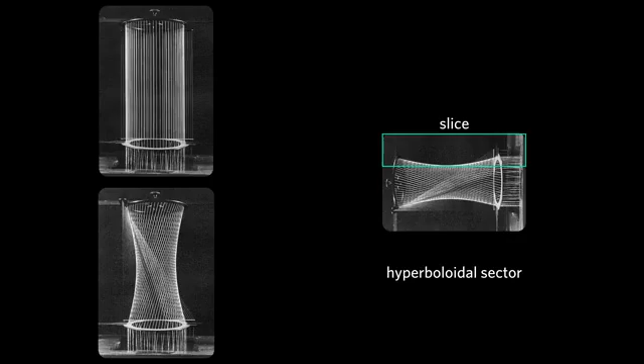If you take that image of these rings, turn it on its side, and take a slice of that, you get the hyperboloidal sector that forms the shape for the overhang or the horizontal cantilever of the Zarzuela Hippodrome racetracks in Madrid, designed by Eduardo Torroja in 1935.

If you look at the span, the size of this horizontal cantilever compared to its thickness, you see how thin that reinforced concrete is compared to the size of the structure. The reason it can hold its own weight up is because of the form. It's not because of how thin or thick a structure is.

The fact that these structures are so thin and can carry their own weight indicates that it's about the form of the structure. It's not about how thin your structure is or how thick your structure is. If you have the proper form, you really do not need a lot of material to hold its weight and the loads imposed upon the structure.

I can demonstrate this concept for you with a simple piece of paper. The single piece of paper can't hold its own weight if I hold it like this. However, if I just give it a little bit of curvature, it can now hold its own weight. It can even hold a few pieces of chocolate, like this. And you could get creative at home and try different examples.

For example, you could take the paper and fold it into a fan shape and even attach a cup at the end. It can hold not only its own weight, but the cup. And then maybe hold a little competition: who can design a horizontal cantilever to hold the most chocolates in that cup. And you'll be surprised to see the incredible amount of load this single piece of paper can hold if you give it the proper shape.

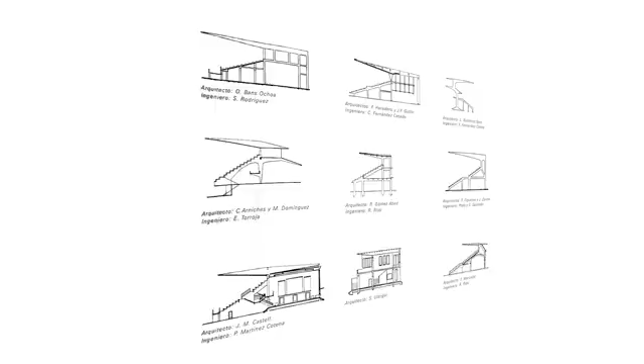The Zarzuela Hippodrome was part of a design competition. You can see on the screen the many entries that were part of that competition, which represents the many different solutions that an engineer and architect team can come up with for the same problem, that is creating a horizontal cantilever to cover the stands.

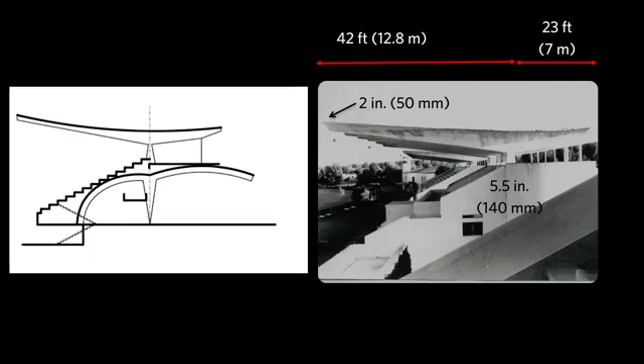The final design put forward by Torroja and his team is shown on the left and in the image on the right. However, this design was not the initial or the original design proposed by the team. It was an evolution of thought. In the end, the cantilever spanned 42 feet in one direction and 23 feet on the other side. In the middle there, we see a single support. Let's look at this final form.

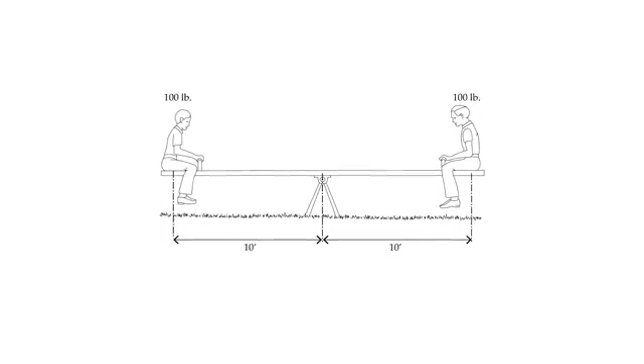You can think of this as a seesaw. Most of you as children played on a seesaw in a playground. And you know that if you and your friend weigh the same, maybe you played that game where you tried to balance that plank on the seesaw so that it would stay still and horizontal. That would only work if you weighed the same and the planks were the same length to the left and right of the support.

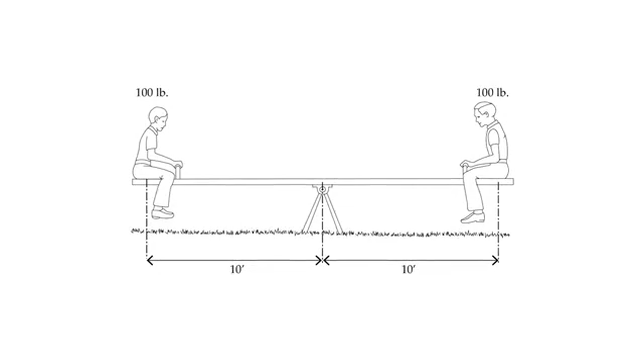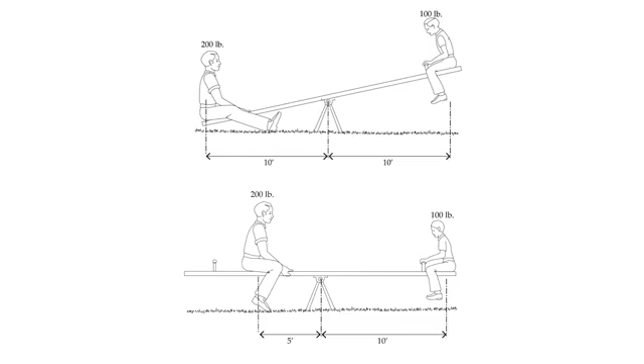However, if your friend weighed twice as much as you, he would need to sit about halfway up from that center support for you to find that balanced position. If your friend that weighed twice as much as you sat at the tip of the seesaw, so you had the same length from the support to the ends, you would fly up and your friend would be sitting on the ground. And the only way to get this plank to stay horizontal would be to tie a rope from your end down to the ground.

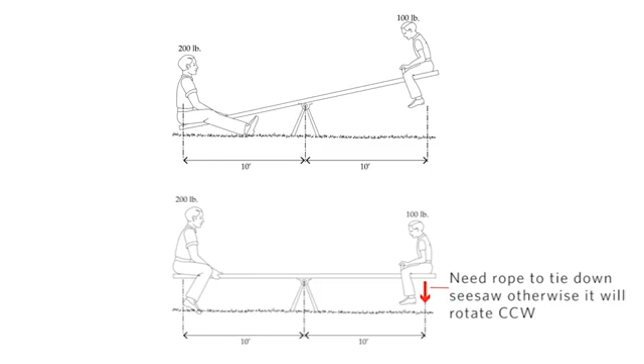In other words, this rope would be able to hold this plank on the seesaw horizontal. That is the concept behind this horizontal cantilever of the structure. Because the left side, the 42-foot span, is longer, it weighs more than the 23-foot span on the right side. So there is a tie that needs to be there in place to hold that horizontal cantilever stable.

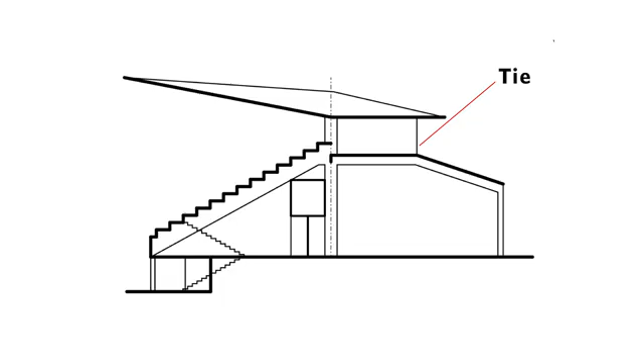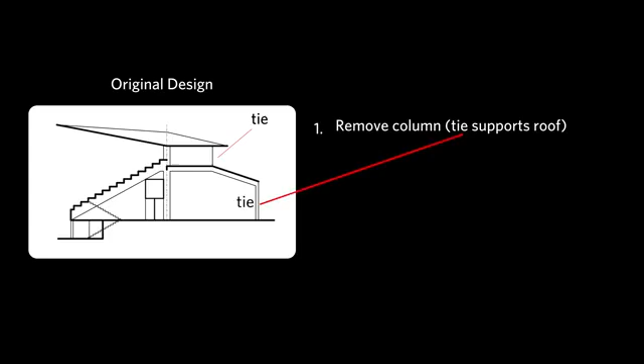Torroja realized that that tie was also going to support the roof underneath it, and therefore the column that was there initially to support that roof wasn't needed. Next, he noticed the staff gangway that was right beside that massive column in the center holding this horizontal cantilever and other parts of the structure. That column was large enough to be able to cantilever this staff gangway. In other words, that staff gangway did not need its own column, and that column could also be removed.

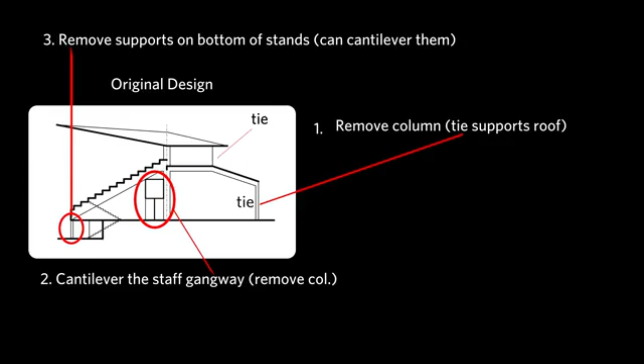Next, he removed the supports on the bottom of the stands, again noticing that that part of the structure can be cantilevered and that column there was not needed. So you can see with the first revision compared to the original design, already he's cleaning up the structure, meaning he's removing unnecessary elements. In the next iteration, he sculpts the main column.

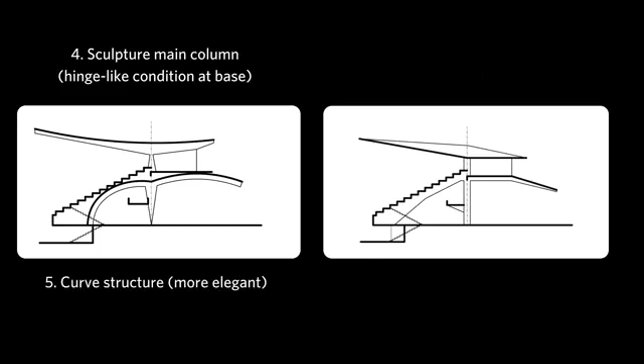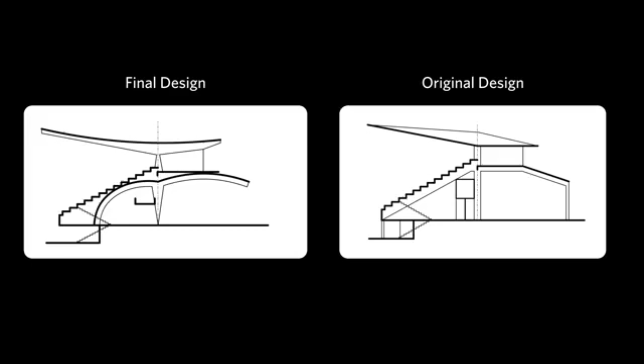He creates this hinge-like condition at the base and also at the top where it narrows. The column narrows at the top and at the bottom to reduce the amount of bending moments in that column space. He also curves the structure underneath the supports to create a more elegant appearance. And with these iterations, we have the final design, the winning design of the competition, and if you compare it side by side to the original design, you see a significant improvement.

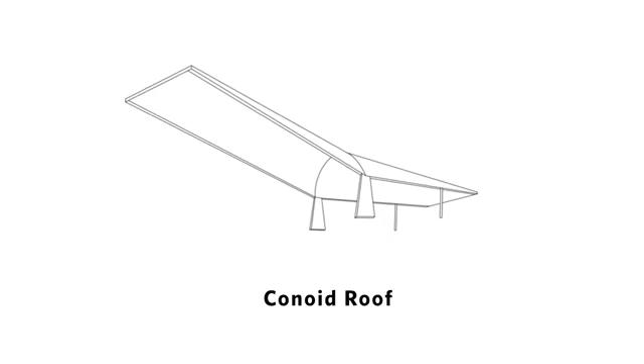Another revision was the shape of the roof of this horizontal cantilever. Originally, it was a conoid roof, a conoid shape, which is the same shape as the schoolhouse roof done by Gaudí. And in this shape, you have a straight edge at the end, at the 42-foot overhang end. Torroja changed the shape to a hyperboloid roof. And what this means is that at the end, you have a scalloped effect instead of a straight edge.

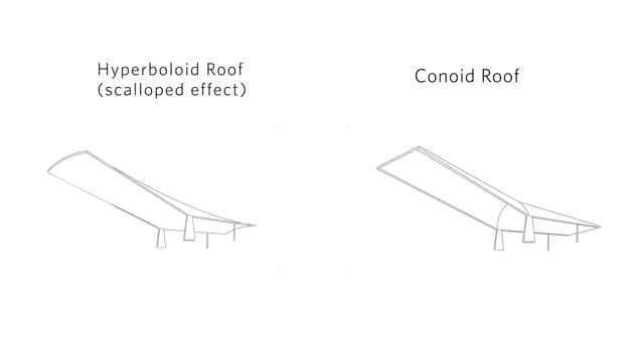The double curvature of this roof makes it very strong. It withstood substantial bombardment during the Spanish Civil War when 26 holes were blown into it. These holes were covered over with concrete and the roof remained intact.

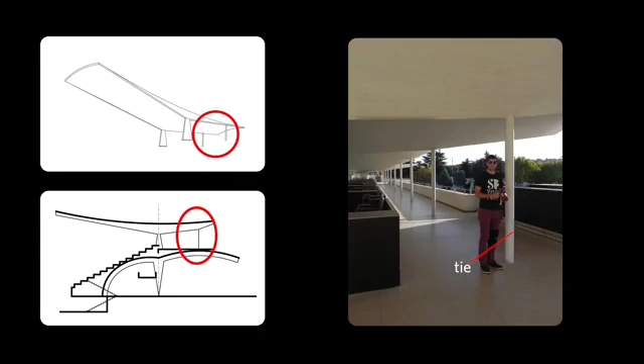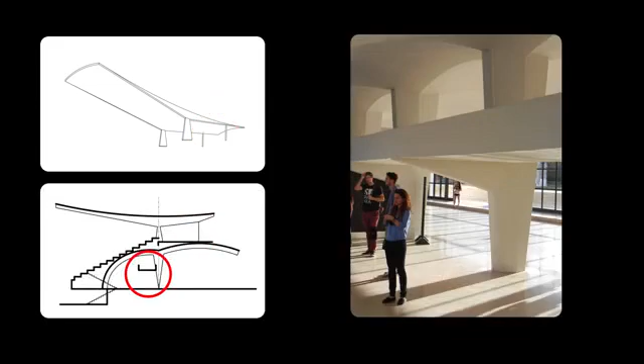I traveled with some students to visit the Hippodrome, and to give you a sense of scale, here you see a student standing next to that tie. From down below, we see the staff gangway and that column supporting the horizontal cantilever. And sitting at the top seat of the stands, again, we see that column which narrows as it approaches that horizontal cantilever. The design for the Hippodrome was intended for a design competition that had a 3-month time limit.

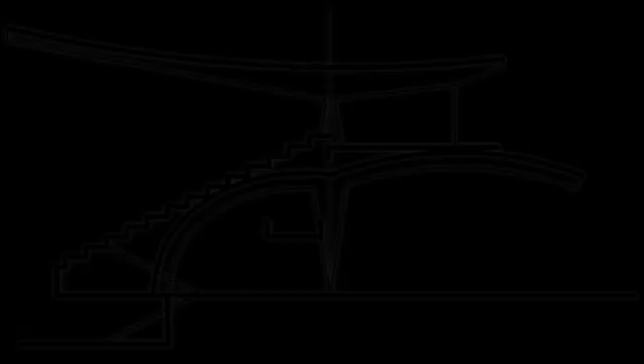Torroja wrote that the whole process just described was a matter of a few minutes, possibly seconds. He reflects on this experience and, generally speaking, the process of design. And when he does this, he asks himself, was this process an imaginative process, or was it logical reasoning based on technical training? In other words, he was asking himself, was this play or was this discipline?

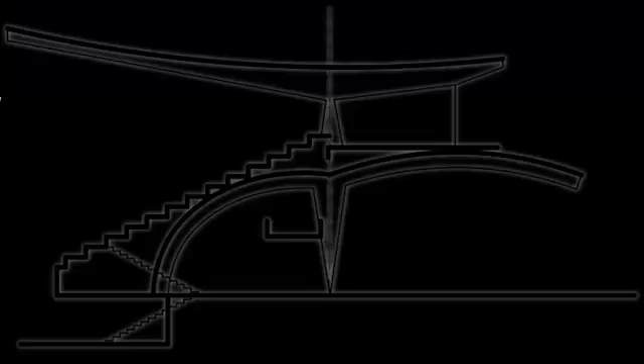This idea of discipline and play of the engineer, that the engineer is bounded by the laws of physics and equilibrium. So there is a discipline there that the engineer must be knowledgeable in. But inside of this discipline, there is room to play. And he answers this question by saying that it's both together, that it's both discipline and play that brought about this evolution of design to the final form.

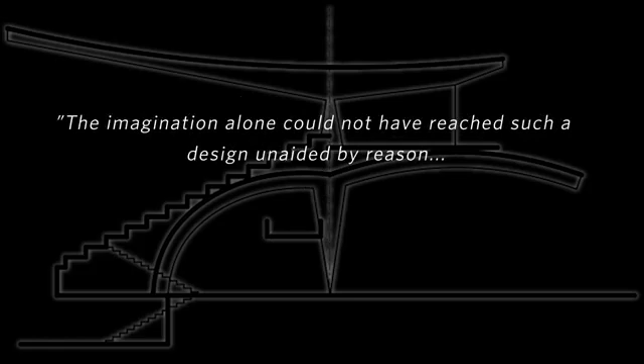He says, quote, "The imagination alone could not have reached such a design unaided by reason. To me, it seems clear that the imagination can operate successfully only in conjunction with the basic principles of technical creative work." This is one of my favorite quotes explaining this concept of discipline and play.

One of my closest colleagues, Ignacio Payá Zaforteza, who is a professor at the Universidad Politécnica de Valencia in Spain, has written many research papers on Torroja and his works. I had an opportunity to ask him some questions. Why don't you start by telling us what inspired you to study Torroja?

It is a curious story because when I was a student, everyone was telling me that Torroja was a genius, but nobody was explaining to me why he was such a big genius. So then I decided to start doing some work and trying to find the original documentation about his work, doing some analysis to discover why he was such a great engineer, so important. And what did you discover? What made Torroja so special?

To me, a nice thing was to discover that he had many things to do with E.T. E.T. the extraterrestrial? Yeah, Spielberg's character. Why? Not only that none of them had too much hair, not only that they had the same initials, E.T. and E.T., but when you study in depth the works by Torroja, you see that his ideas were much more advanced than those of the people of his time. So somehow it was as if he was an alien coming from another planet. He was so advanced that it was just amazing. Can you give us an example of a project that was so advanced and what year, more or less, this was happening?

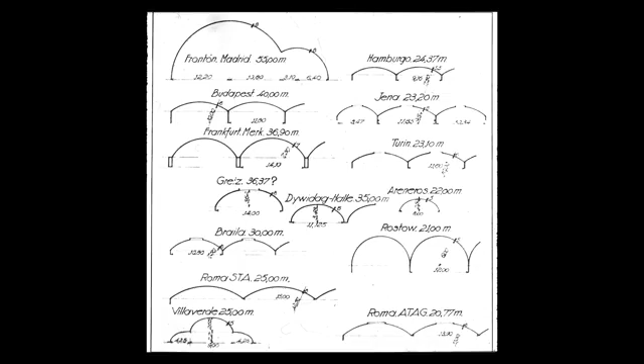But it is even more special if you compare it with the shells that were built at that time by the Germans, for example, with the shells built in Budapest or the market of Frankfurt. So there you see that Torroja's shell had a longer span, a longer dimension longitudinally. But it is not only that, it is also that the cross-section of Torroja's shell was completely new. Nobody before had done this kind of shape with two lobes, as you can see here. The other shells were much more conventional.

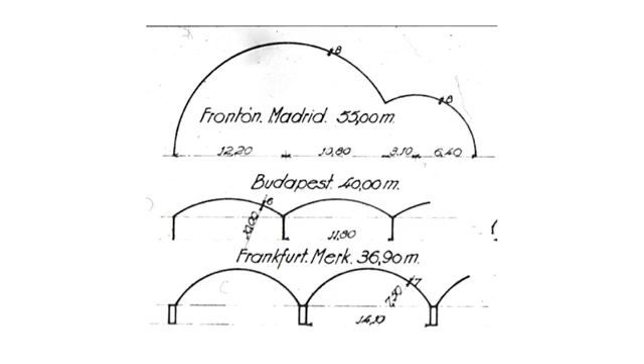And also, Torroja wanted to make a completely ribless surface. A ribless surface? Yeah. For example, here in the shells of Budapest and the Frankfurt market, you can see some beams that provide the stiffness and support to the shells. And Torroja, in the intersection between the two lobes, didn't place any beam. So where the two domes intersect at that V, there's no rigid beam? No, there is a kind of beam, but it is embedded in the surface of the shell, so you cannot see it. It's a completely ribless surface.

And it took a lot of courage to build such a long span and an unusual form, correct? Because this was a time before computers. This was 1930s or something like that? 1936. It took not only a lot of courage, it took also a lot of mathematics. So Torroja was a great mathematician. He was, in fact, named a member of the Academy of Mathematics of Spain. So he had to solve a very difficult problem with a system of 54 differential equations.

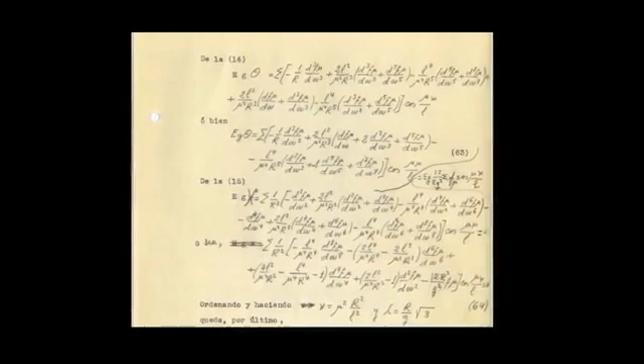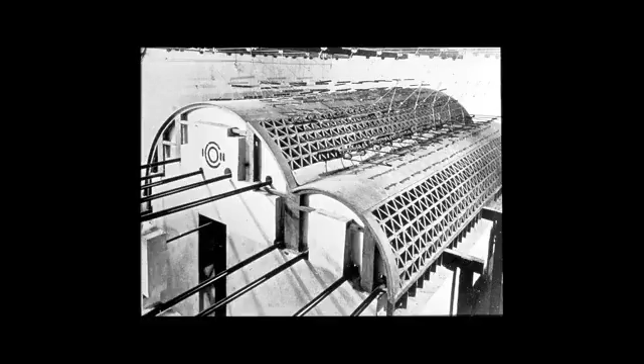He had two teams that helped him to solve the problem, and he found two different solutions. So at the end, he concluded that the best thing to do was to compare the results of these mathematical models with a reduced scale model built in a lab that you can see in the picture. But at that time there was no company in Spain able to make these reduced scale models, so he had to create the company. So somehow he became an entrepreneur, and he created a company called Icon to do these models and similar models for other structures.

The cross-section of Recoletos reminds me a little bit of the Romanesque churches. Well, there are some similarities, like the shape of the arches, but there is a very important difference: in the Romanesque churches you always had a column supporting the vaults, and here Torroja took the column away. You mean a column would have been in between the two vaults? Yeah, in the Romanesque churches. Torroja is like a kind of magician that takes away this column and the structure still stands, so this must have been something completely new for the people of that time. He is like a magician. He does things that nobody can understand how they happen.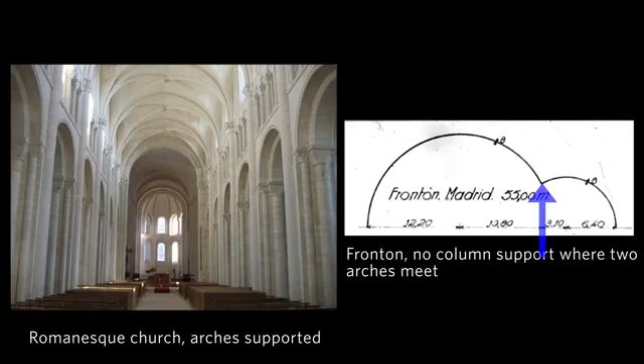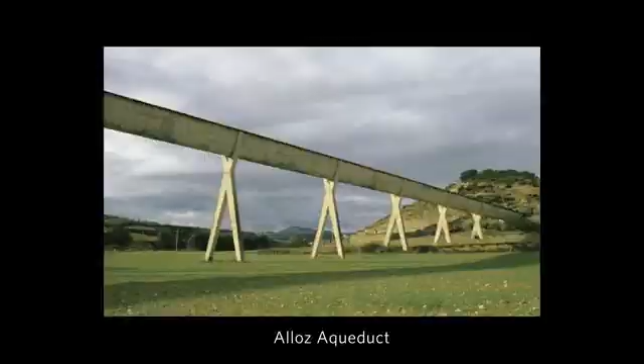You've written many research papers on Eduardo Torroja and his projects. Can you list a few of those projects that you've researched? And have you found magic, so to speak, in all of them? Okay. Well, for example, we have done research on the Alloz Aqueduct, on the St. Nicholas Church in Gandia, and on some projects that were not built. And it was very curious to realize that some of these projects were not built because they were too new and too advanced for the time.

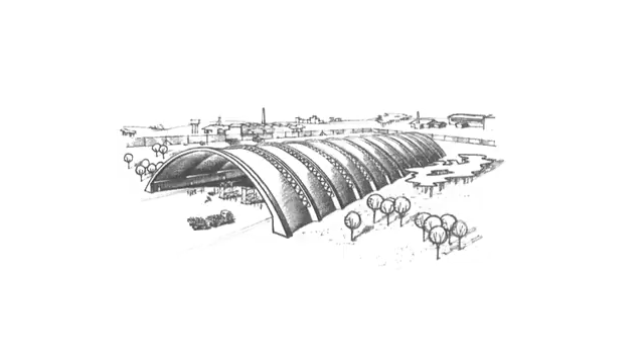For example, he did a hangar for airplanes, and it was a completely new shape. It was 20% less expensive than a conventional design, but it was never built. And Torroja wrote that it was not built maybe because it was too revolutionary for that time. So the owners did not have confidence? Is that more or less what happened? We don't have any clue about that. The only clue that we have is that Torroja wrote that it was 20% less expensive than the conventional design, and that maybe it was not built because it was too revolutionary.

Well, thank you very much for talking to us about Torroja. It was very interesting. Thank you. It's been a great pleasure.

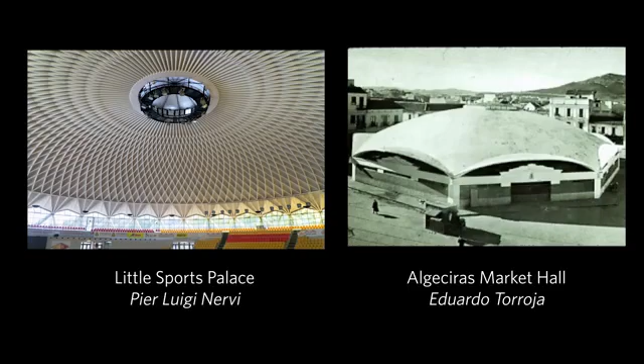Thank you. By now, hopefully, you're starting to see that there are many possible solutions to an engineering challenge. Next, let's examine a dome designed by Torroja and compare Torroja's approach to design to that of Nervi.